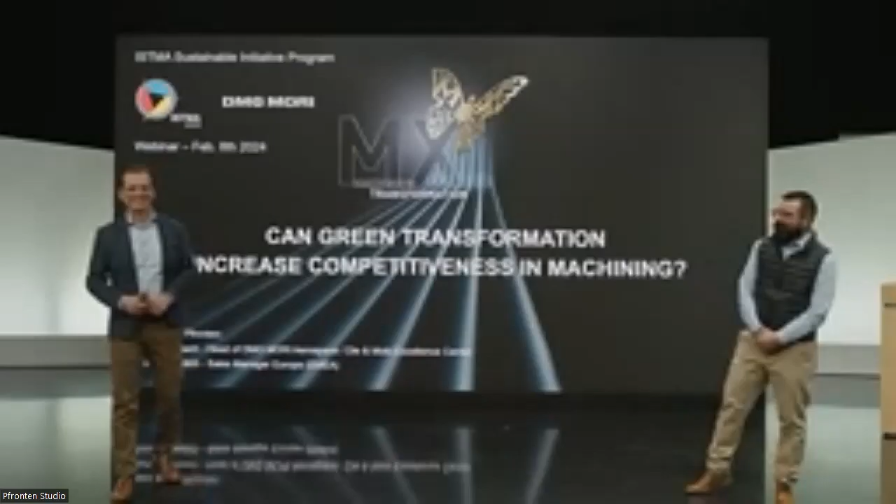Yes, thank you very much, Markus, for the kind introduction. Welcome to DMG MORI in Pfronten in the south of Germany. I have heard that we have participants from almost all over the world, so we are meeting now in the south of Germany. Very welcome.

For the webinar topic, we thought about asking a question about green transformation and whether competitiveness is possible in machining by going on this transformation. So we will do the presentation together. I will start with some general overview and our product strategy, and then my colleague, the other Michael, will go in more detail how we can use machine tools more efficiently with less energy consumption.

Before I start into the topic, give me 30 seconds to give you a short idea about DMG MORI if you don't know us. DMG MORI is producing machine tools, automation solutions, and solutions for digital and green transformation. We have 16 R&D and manufacturing locations worldwide.

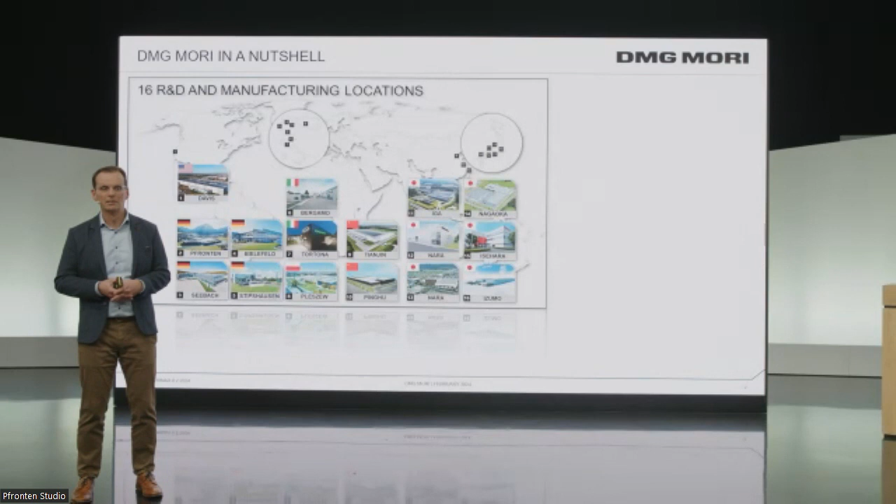So we are here in Germany, in Pfronten. We are the second largest factory of the whole group. We have more than 100,000 customers worldwide. I know there are some participants also from South Africa. We don't see Africa on this map, but we have also customers in this beautiful country and area.

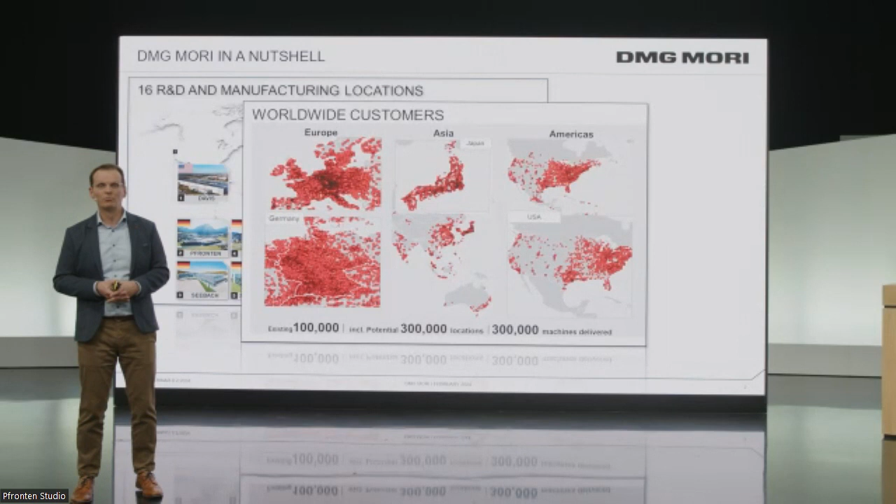We have around 300,000 machine tools worldwide operating from our brand, and every day there will be more. In sum, we are represented in 43 countries with sales, engineering, and service, 113 different locations. So you have an idea what DMG MORI is doing.

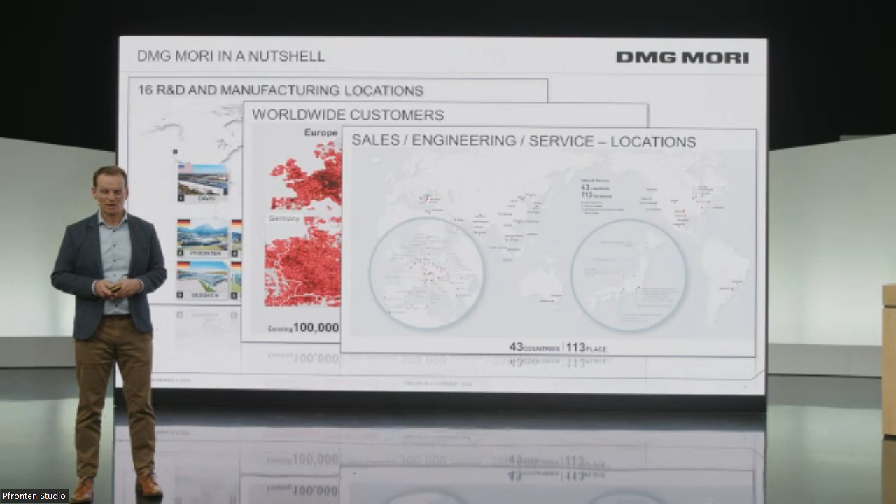But let's go to the topic. When customers ask us for machines or intend to invest into a machine tool, of course there are many technical questions to be answered, size of machine and so on, and a lot of commercial questions as well. But there are other questions which may also need to be answered, especially at this time where we have to look for sustainability and how we can achieve all the targets and challenges which we have.

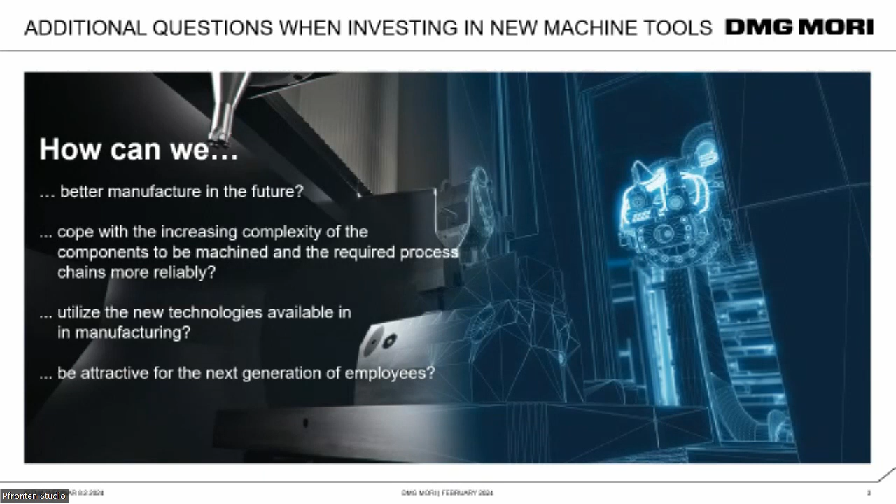So we have to think how we can manufacture in the future better than in the past with maybe old machine equipment. Today the parts, also in the die mold industry, in the tool industry, are more complex. They require a more complex process chain. We have to think how we can do this more reliably and get a better solution for this.

Today's machine tools have more capabilities than maybe 10 and 20 years ago. We have to ask ourselves how we can utilize these machine tools better. And of course, we always talk about a gap in skilled people, and especially the young generation. We have to be very attractive in production to attract young people to go into production, to go into manufacturing. This is also a very important obligation for us.

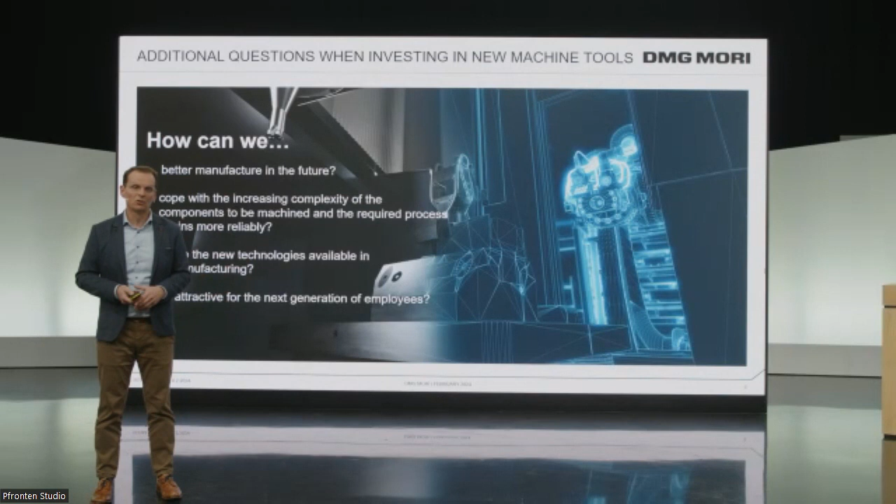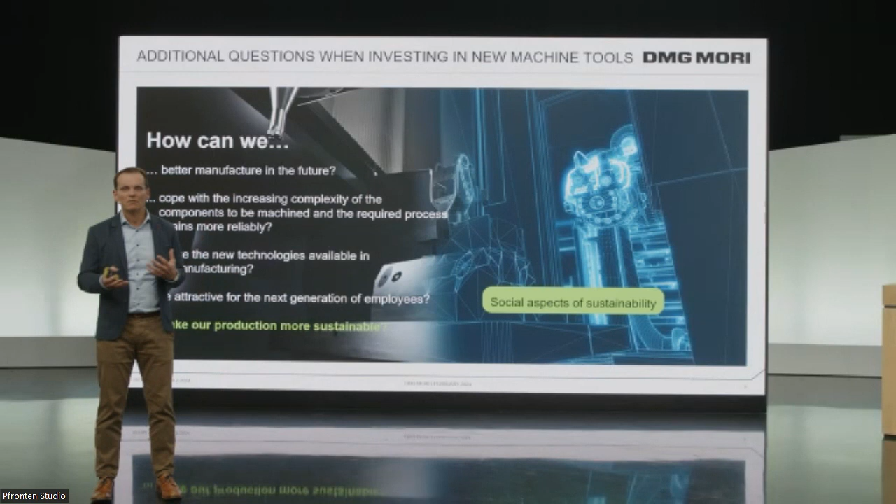But last but not least, we also have to think how we can make production more sustainable. This is, of course, sometimes this green question, sustainability, but thinking about the employees is also a social aspect of sustainability. So when we answer this question, we also take care of sustainability already. And for the other technical questions, we can also ask which technology helps us better with our targets in terms of sustainability. As you already can see, it's mainly a technical question we have to answer to become more sustainable, and then at the end also to become more competitive.

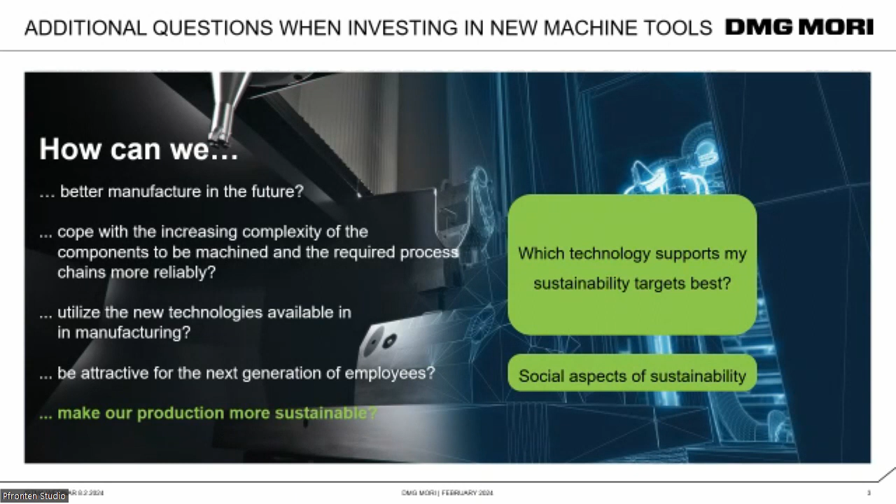In DMG MORI, we have a strategy for this, a product strategy. We call this machining transformation. You have seen on the first slide the butterfly, which is a symbol of transformation, of a journey, of a change. This machining transformation consists of four topics: process integration, automation, digital transformation, and green transformation. These things also belong together. I'll give a little example at the beginning.

When you have a component you want to machine on traditional machines, you may have different steps on different machines. When you use a modern machine, you can do process integration and utilize one machine much better than the simpler machines before. With higher utilization, you already give a contribution to green transformation - that's always about maximizing the utilization of your equipment.

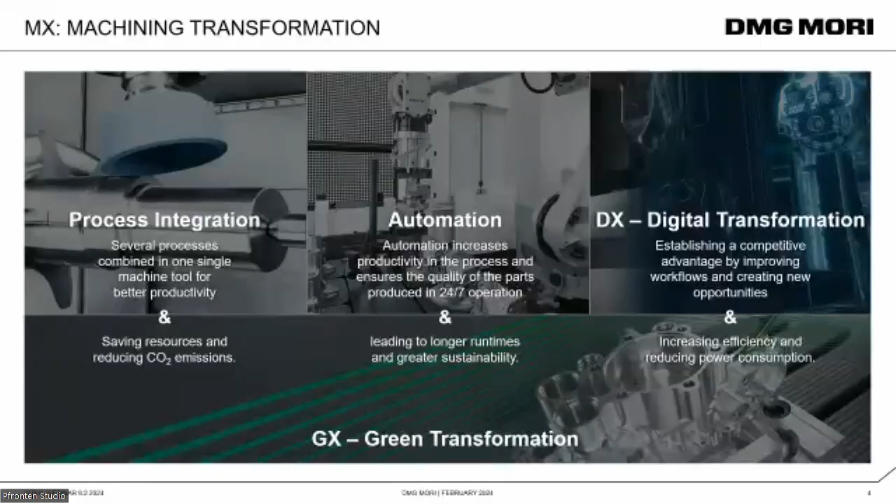When you then introduce automation, you increase utilization even more, up to 24/7. You achieve better quality, meaning less waste in materials, less scrap, less tool wear, and hopefully better quality at the end with less unnecessary effort. But when you have poor quality and a poor process, you have to invest in more resources. So automation also gives a contribution to sustainability.

These two steps make things a bit more complex, and you need software and digital tools to decrease this complexity. Then we are in the middle of digital transformation where we utilize software and hardware. Another example is that this software can make your workflows more efficient - you can get data from production to see where your waste is, where you spend too much time, money, and resources making a product. Based on the data, you can better work on improvements. So digital transformation also has a contribution to green transformation.

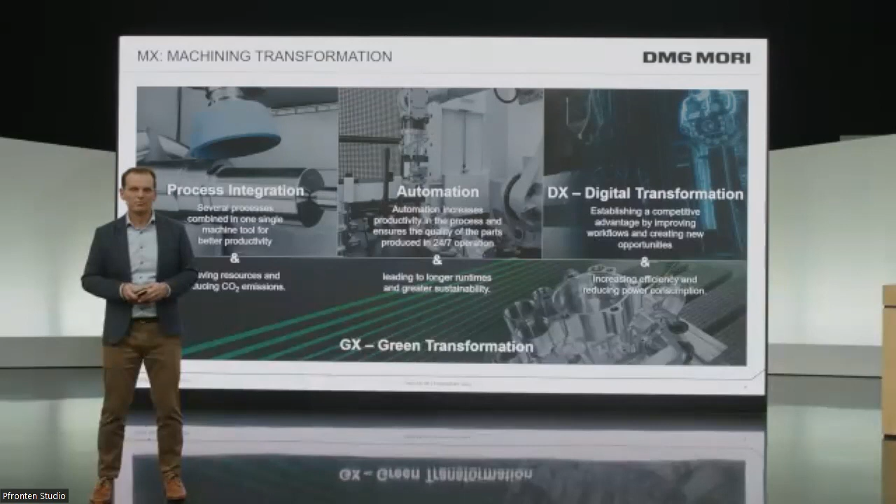So this concept, at the end, is a comprehensive concept. But nevertheless, we have to do more on the machine tool itself, where my colleague Michael Kieslich will show you what's possible. But first, we have to understand the full concept. I have also prepared two examples to show this in more detail.

Looking at this part - a camshaft, not a complex part - when we go through a conventional process chain in the past, we may have made this part out of 3 different raw materials on different types of machines. We had to have many operators to run the machines. Some machines are bottlenecks, some are idle most of the time. This is not very sustainable, and at the end, it's also costly.

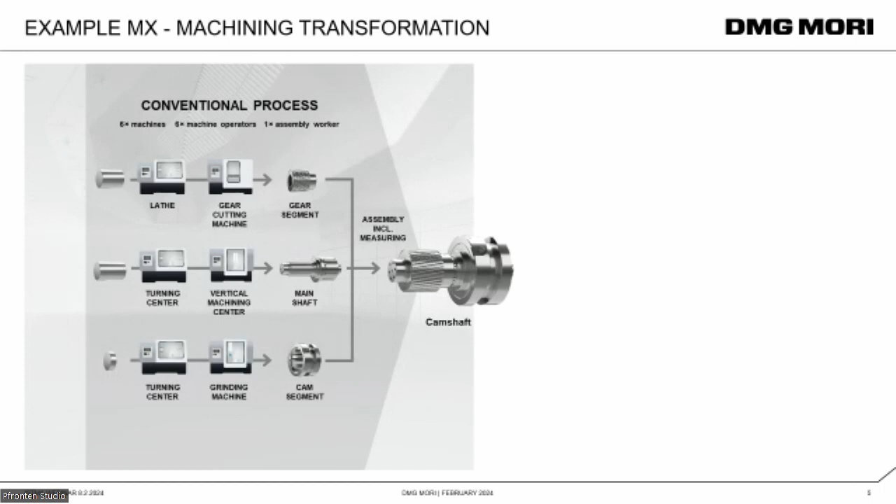When we go to a machine transformation with a modern machine tool where we can do really good process integration, we have the opportunity to make the part out of one raw material, with a complete integrated process chain - we can do turning, milling, gear cutting, and grinding only on one type of machine, meaning we can optimize much better. We can optimize one machine, but we cannot optimize and link several machines - that's more complex, more difficult.

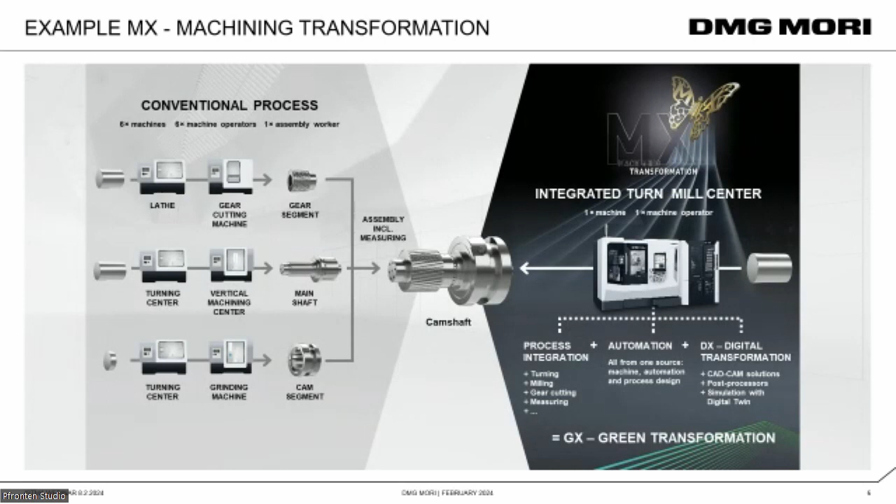To realize it, we need digital support - we need CAD/CAM systems, simulations, post-processors, and maybe many other things. So we have to see this in a holistic view, and then we can achieve higher sustainability in production. At the end, this production on the right-hand side is more sustainable than the conventional process chain on the left-hand side.

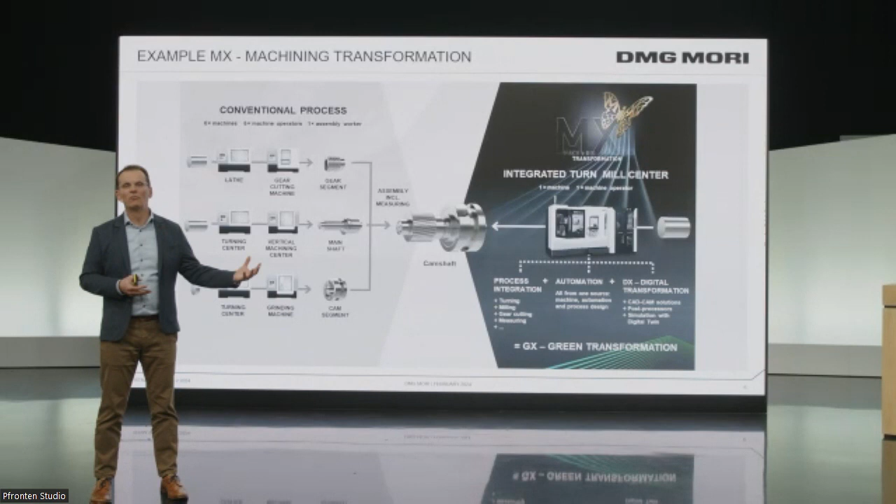I have another example, the last one, from another event. It's a rotationally symmetric part - in this case, a gear. You see on the left-hand side a conventional process chain, and on the right-hand side, process integration. We go from 13 operations to 5 operations, from 5 different types of machines to 1 type of machine.

We can significantly reduce the time to make the part, also the throughput time in my factory, and I can reduce the cost of my part. So we can also see that this integration of processes makes me more competitive at the end.

But we also make a big contribution to sustainability here, because we utilize one machine much more than other machines, which are idle most of the time because they don't use them all the time. And we have no bottlenecks, where we'd have to spend extra energy to overcome them, for example. We can do automation now and even increase utilization, and the process is more reliable now.

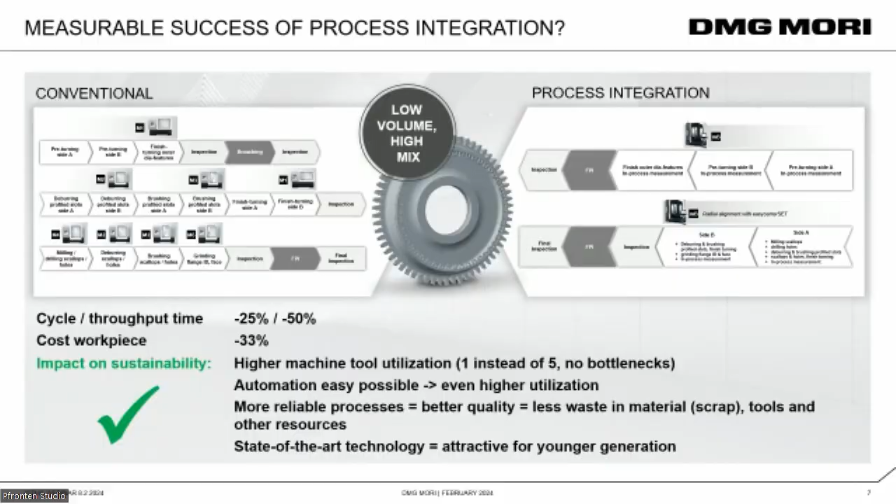So we have less waste in material, less waste in tools, and maybe we waste other resources less too, because of much better processes and a better process chain here.

Finally, we have state-of-the-art technology, which is more attractive to the young generation, because we don't work on old machines - we work on the most modern machine type. With automation, we need good engineers, and I think it's a very good motivation for young people to work in production, because production moves from an old style to a very modern style with the latest state-of-the-art equipment.

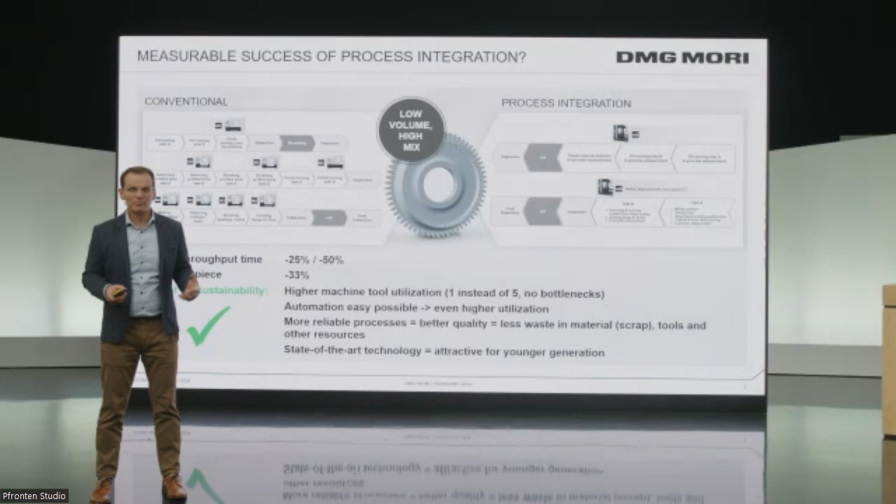This was just my introduction, and I hand over to Michael Kieslich to tell us more about what we can do in machine tools. Yeah, thank you, Michael.

Energy efficient machining and sustainability. Increasing energy consumption in the production and the rising and fluctuating prices are currently the driver of the green transformation. However, the awareness of sustainability is not only changing in the private life, it's also changing in the world of work and for companies. But let's start really on the top.

Here you can see the global energy demand in the year 2018. We had approximately 23,000 terawatt hours. 38% of this was used by the industry, and the unbelievable number of 2% went to the metal cutting machine tools. That's the number 460 terawatt hours. To get a feeling for this, whole Germany in the year 2018 used 574 terawatt hours. So that shows the potential on the machine tools to save energy and to be more sustainable.

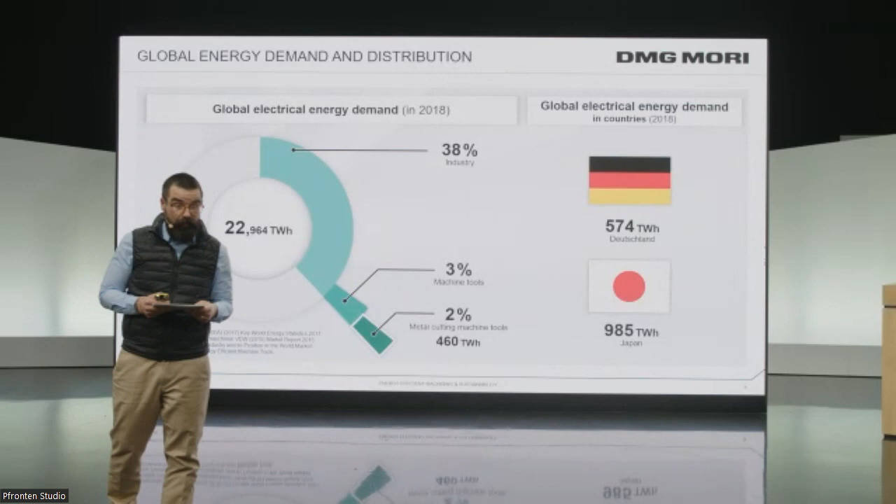When we go one step deeper and take a look at the machine tool, when you order a machine, normally you will get some planning documents, and in the planning documents of a machine tool, you see the power rating. And this shows that the main spindle needs 51% and the feed axis need 23% of the power rating. But when we take a look at the real and actual energy demand, it looks completely different.

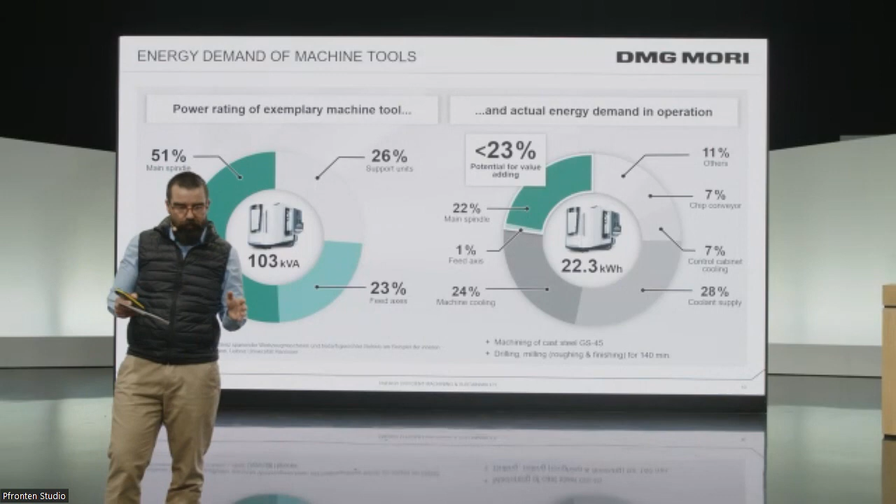It's important to understand that the energy consumption of a machine tool is always part specific. Is it a lot of roughing? Is it just finishing? A lot of tool changes and so on. So we checked here some simple part, and then we see that the main spindle and the feed axis, so the value adding features in a machine tool, just use 23% of the energy consumption. The rest is going to other units, like the machine cooling, to cool down the machine and bring the accuracy, the coolant supply, cooling of the control cabinet, or the chip conveyor.

So in our eyes, you have actually two options to reduce the energy consumption. Actually, it's three options. I will show this later. It's a quite simple diagram. On the one side, we have the process time. When you reduce the process time, you normally use less energy. How can you achieve this? Like the other Michael said, our idea is MX, the machining transformation. With process integration, you reduce the process times. With automation, you will get higher spindle run times and less downtimes on the machine tool.

Digitization with a simulation, or also to find out why a machine is down. This can be done via digitization in the machine tools. And this is a job of the customer, of the worker, mainly. On the other hand, the reduction of the real energy demand of the machine tool. That's our business, but also your business, because you have to use some options.

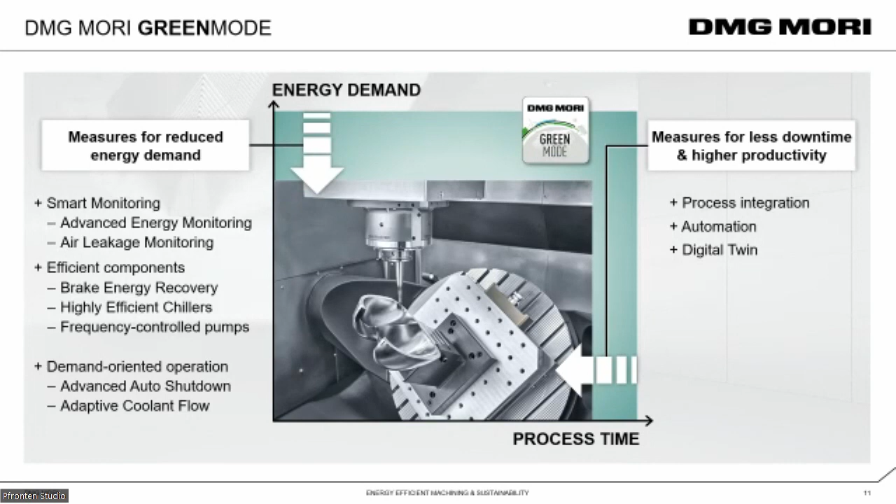How do we do this? We have a smart monitoring. A monitoring will give transparency, will give awareness to the worker of what the machine tool really needs when you produce a part. We have a monitoring to check if we have a leak in the pressured air circuit. We have to build in efficient components, highly efficient chillers, frequency controlled pumps, or we are using the brake energy and bring it back to the net. And a big focus topic for us is demand-orientated operation.

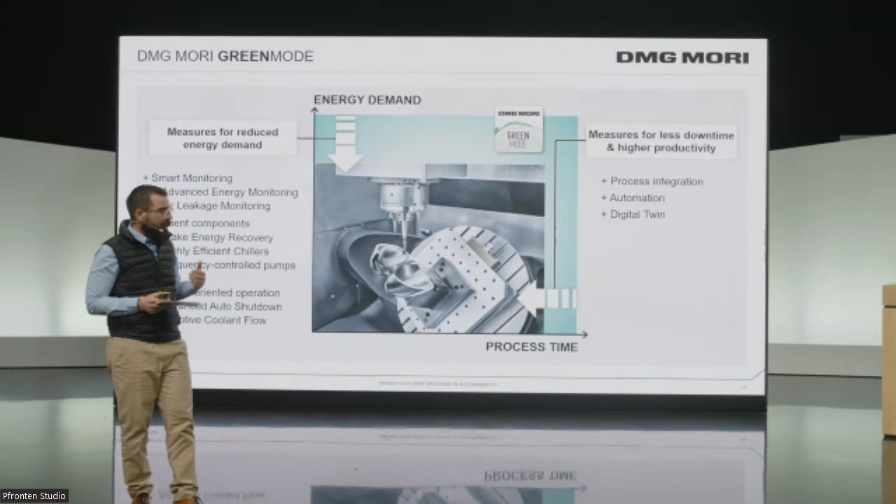Like a lot of machine tool suppliers, we also have some smart solutions for an automatic shutdown of a machine tool. That means if the machine is not working, it goes to an efficient mode. And last but not least, adaptive coolant flow. And this is the third point, the innovation. I jump over this, and our innovation, adaptive coolant flow.

What is our idea? When you take a look at this diagram, you can see the flow rate and the usage of power on the pump, in this case 80 bar in a coolant pump. And with this diagram, you see that the curve is quite steep. That means if you want to have a higher flow rate, you need a lot more energy on the pump. And from some point, it makes no sense anymore.

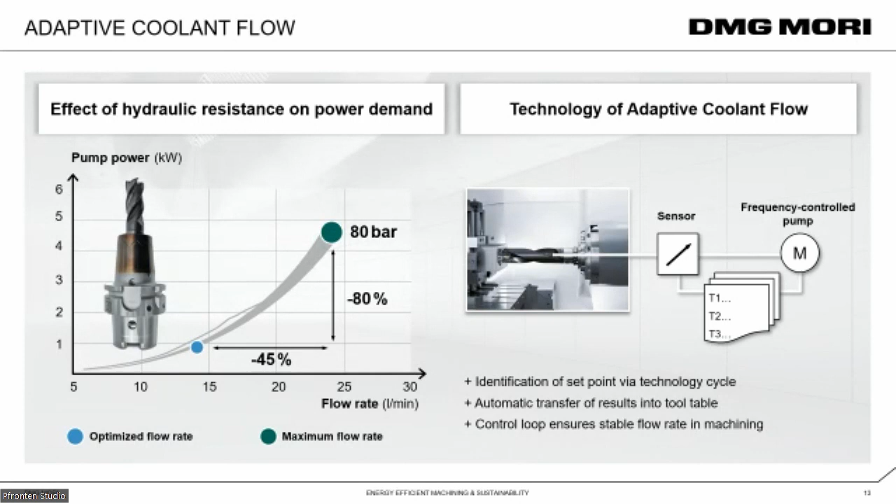Especially with smaller tools, this curve will be much steeper, very, very steep with some tools. And then it makes no sense to bring a lot of energy into the pump, because the flow rate will not be higher. So the flow rate is now a quite new unit. Nobody knows what is the right flow rate for a tool.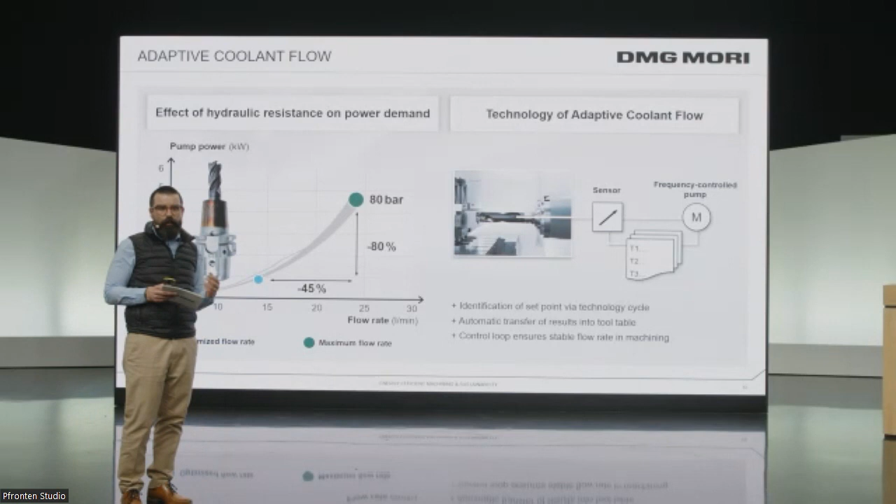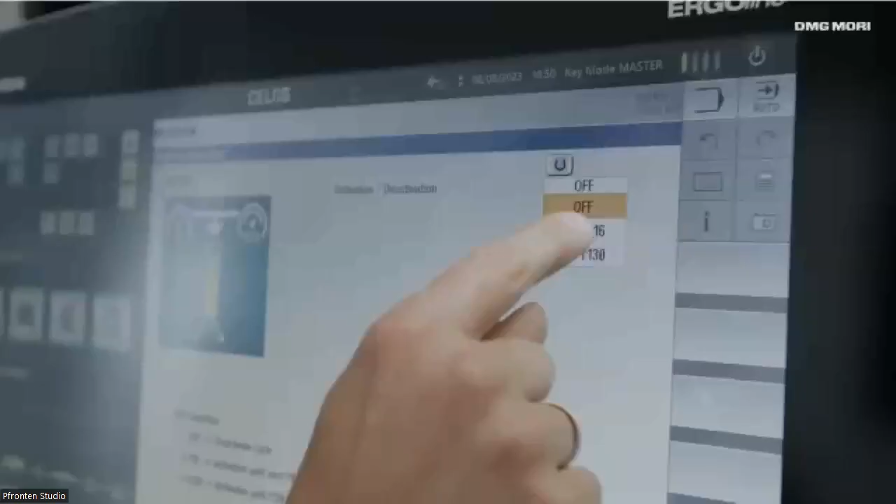And for this, we developed a cycle. With this cycle, the machine tool will check the tool on the first usage. So we select everything, and then on the first usage, the tool will come to the machine.

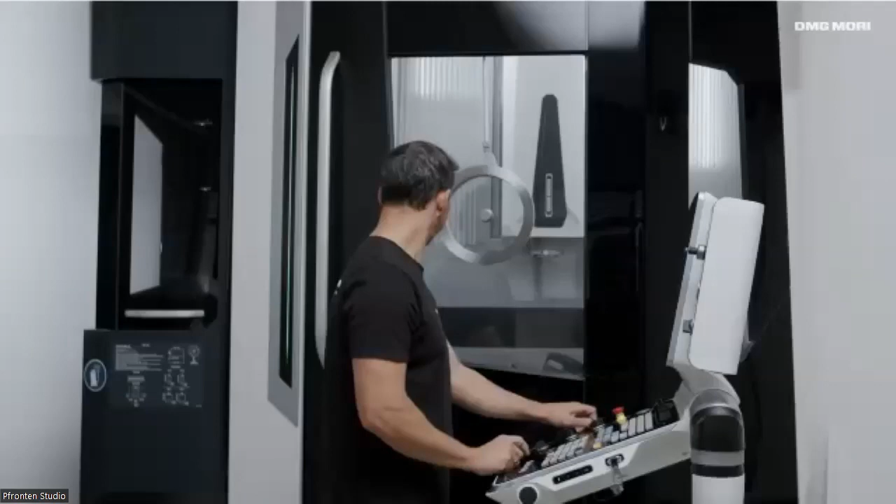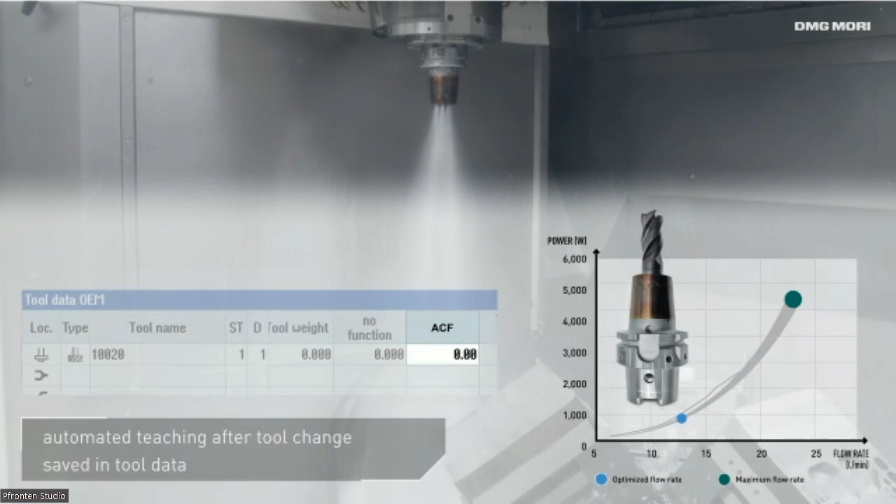The machine will check the tool, and we set the correct flow rate for this specific tool in the tool table and lock this down. And now the customer can work with this.

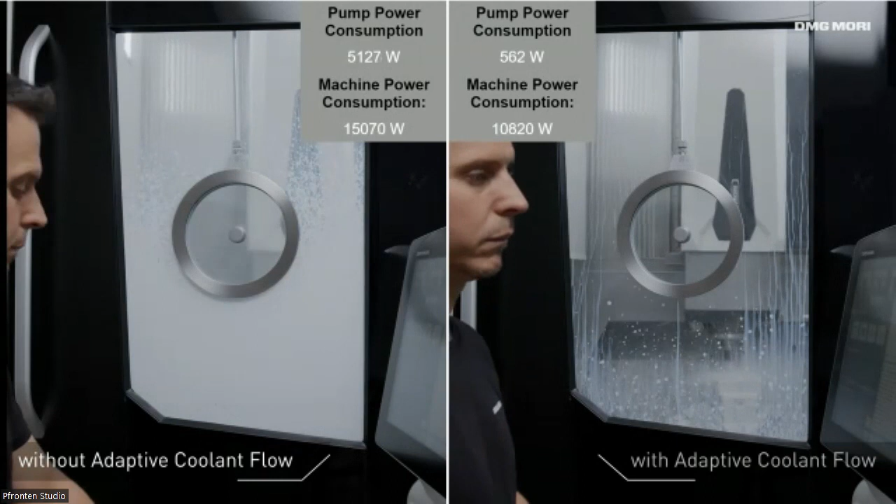And here the comparison. On the left side with 80 bar machining, the pump needs 5,000 watt. On the right side with adaptive coolant flow, 500 watt. So we have a reduction on the pump of nearly 90%.

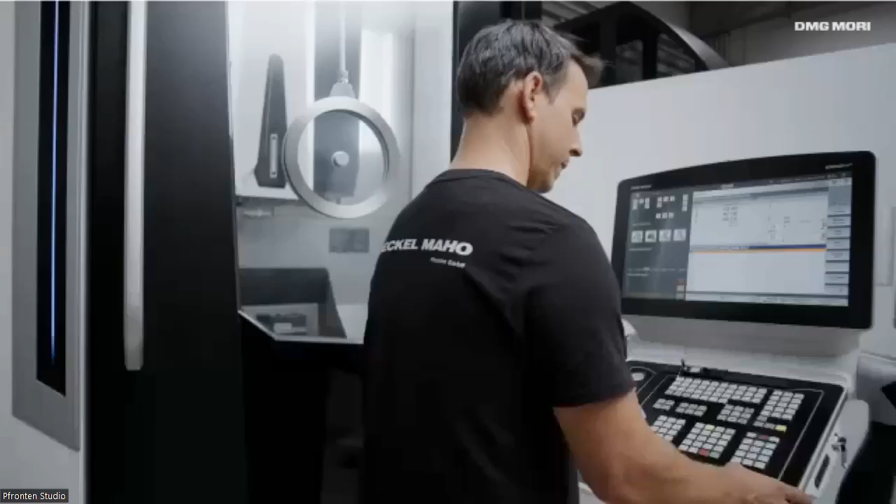Also here you can see much less oil mist in the working room area. This is also sustainable. Less oil mist means the vacuum doesn't take so much coolant out of the machine. You don't have to refill so much. That's also very sustainable. And then we noticed as well, especially in deep hole drilling, that machining with a constant flow rate will give a much higher process safety.

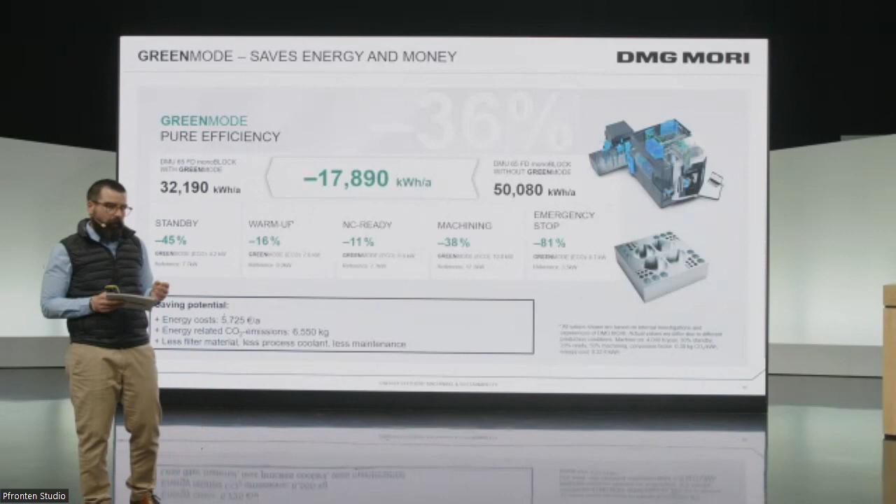Again, to get a feeling about the numbers and the potential on machine tools, we have here a comparison. We used our own machine, with all our energy saving measures on and off, and made some test parts. And here you can see we have in these test parts a specific process. We have a standby, a warm-up, waiting for machining, and emergency stop.

And when we use all our measures, you can see in the standby, we save 45%. How we save this? The machine knows that it is in standby, and we shut down the pneumatic, we shut down the hydraulic, we shut down the light. So we save 45%. On the machining, we save nearly 40%. This is driven from the adaptive coolant flow. We save 90% on the pump, and when we look at the complete machine, it's 38%.

And quite interesting, the emergency stop. It's quite common that when the shift is at the end, the workers put the emergency stop. That's the worst case. The machine is on, the motors are in control. So we compared the emergency stop versus our green mode auto shutdown. With this, we save 81%. So huge numbers, and it's quite easy to do this and to select this.

That means in a complete process all over, we saved 36%, and that's nearly 18,000 kilowatt hours per year with some calculations. And as comparison, a normal 4-person household has approximately 3,000 kilowatt hours per year. Just to get a feeling.

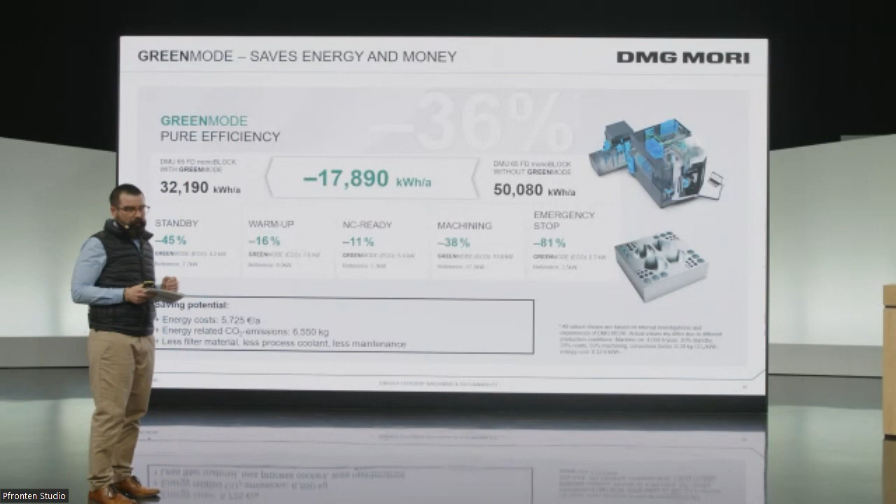But you can start now with your existing machines. How can you do this? A lot of machine tool suppliers have something like an auto shutdown. That means there is something to select so that the machine goes into an efficient mode. Use process optimization also with your existing machines. Reduce the non-productive times. Why? Finally, a producing machine tool is the most efficient machine tool. A waiting machine tool just needs energy when it's on.

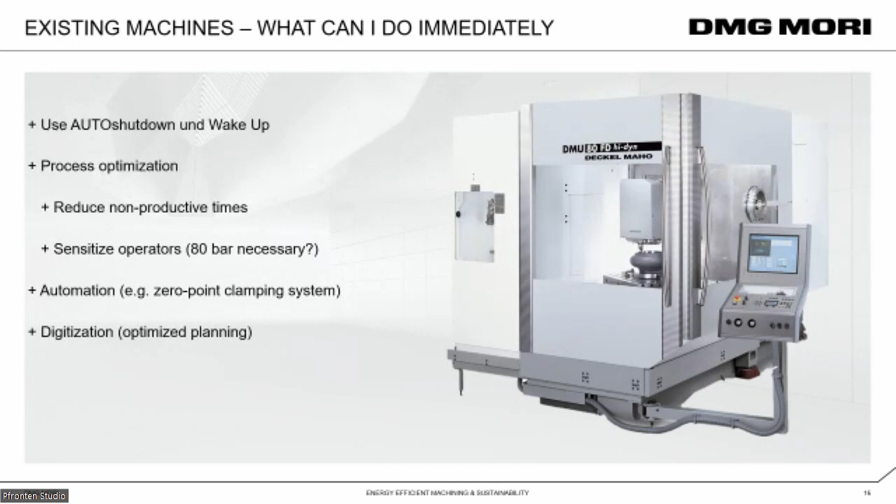Speak with the operators. If you have a variable pump, an 80 bar pump, the high pressures are not necessary. The high pressures need a lot of energy. Start with automation, for example just a zero-point clamping system to reduce the downtimes, and start with digitization. Have a good planning. Find out why the machine is waiting. Is it the raw material? Is it the tools? Just so that you get the big picture of your workshop.

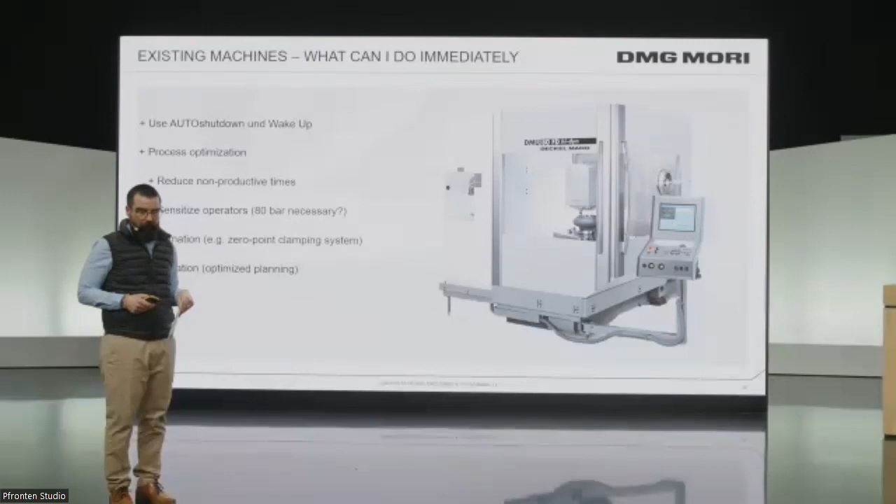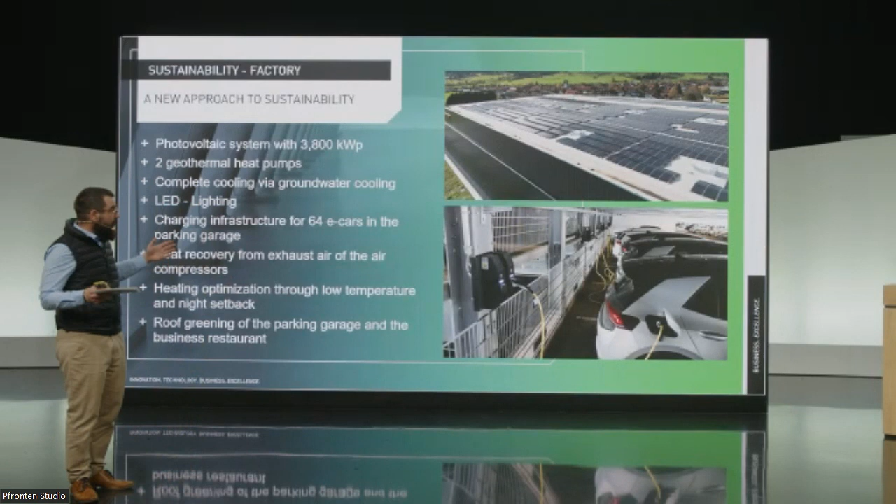So finally, what our factory is doing in the green transformation: we put a lot of photovoltaic on our buildings, as you can see. We started years ago when we built our new facilities with a very efficient heating system. So we have geothermal heat pumps, cooling by groundwater, a fully climate-controlled facility. We need this also to build high accuracy machine tools.

We changed everywhere to LED lights. We have a new charging infrastructure in our parking house. We use the heat again, also for the temperatures in the offices, and the rest of the facilities that are not ready for photovoltaic, we have greening and grass on them. Yeah, that's the short overview of our idea of the green transformation.

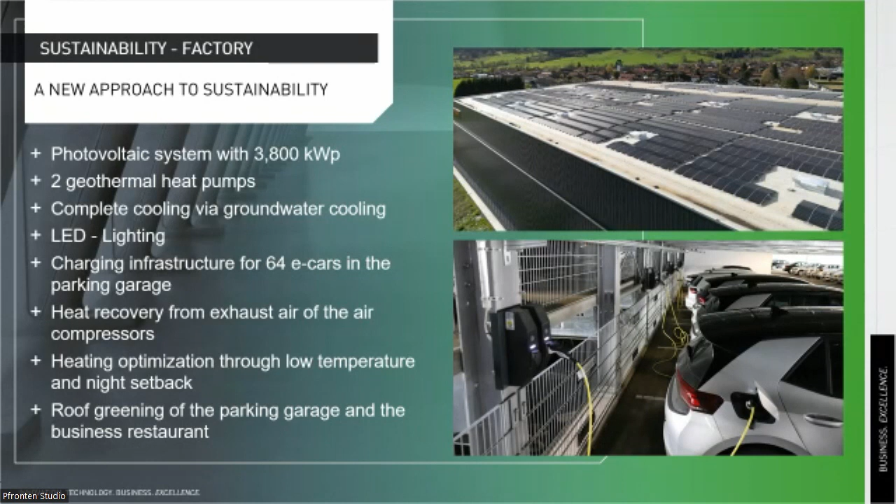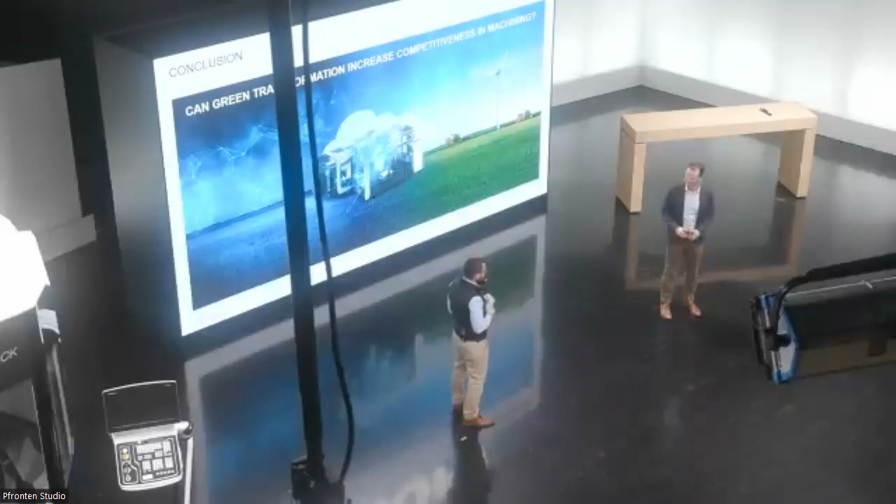And I will hand over to Michael again. Thank you, Michael, for this detailed technical explanation of what can be done on machine tools. We don't want to do less production. The answer means we have to do more production on the machines to be more sustainable. So when we started with the question, can green transformation increase competitiveness in machining? As a conclusion, we can say, of course, yes, but you have to do it in the right way.

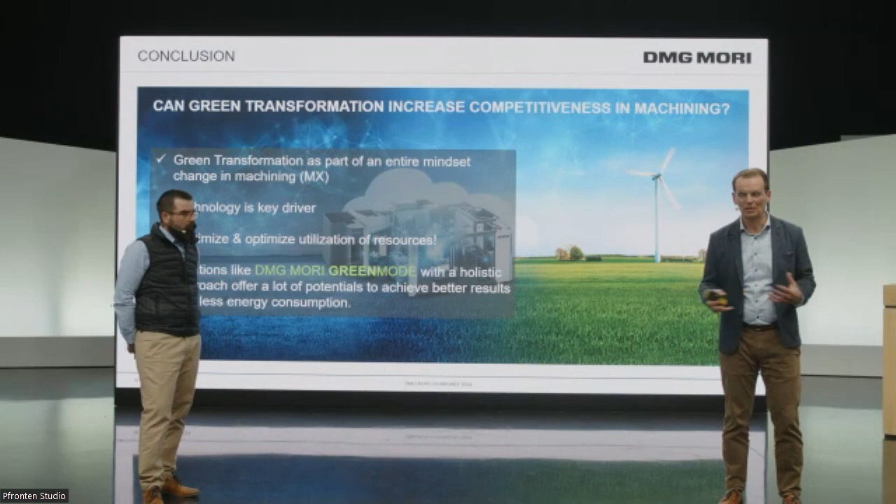And we have summarized that a little bit here with some words. You have to see the green transformation as a part of an entire mindset change in machining. In brackets, you see the MX is our machining transformation, this is our strategy. But I think every company has to define their strategy, how to be more efficient in the future, utilizing the equipment much better, and of course using state-of-the-art technology. Technology is key driver in sustainability.

If you have a production with very old machines with a low utilization, you waste energy in space, in heating of your factory with equipment which is standing around. So finally you have to maximize your resources and optimize it, as we have seen with the new solutions which are developed. And we just had the two weeks open house the last two weeks, and we had an own area where we showed these green mode technologies.

And I think it's not a surprise that many of our customers were very interested in this, to learn how they can utilize this in their factories. And we see that in examples like green mode, of course, a lot of research work was going on in the past, and now we have the solutions available, and I think there will be even more to come in the next years.

When we see this in a holistic approach, not just only the cutting tools, not just only the coolant, not only the machine tool itself, we have to look to the whole process, to the whole process chain. Then we see a lot of potentials to achieve better results, and also what I think we have seen on the adaptive flow control, we even get better quality because we give the tool the right volume of coolant, not too much. So even the quality increases, which also is sustainability, and we can produce the same parts with 36% less energy. And this is a good example.

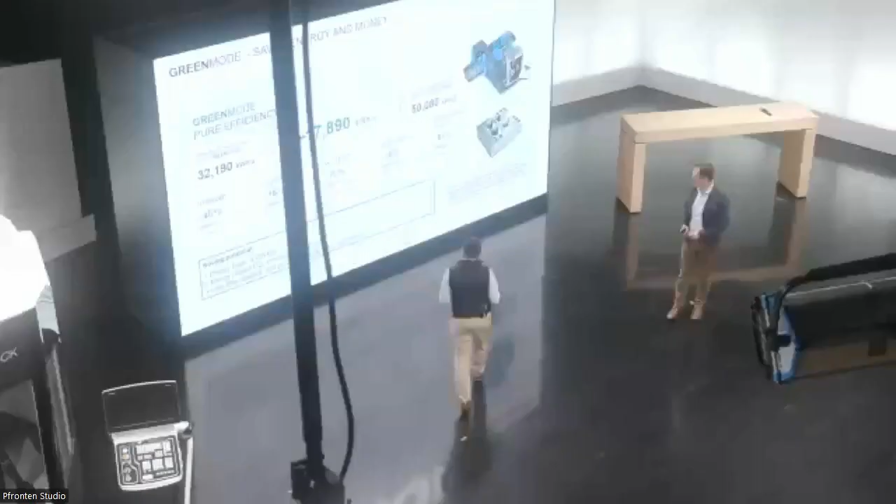I have a question to Michael Kieslich. In one of your charts, green mode saves energy and money, there was a calculation basis of energy costs per year. The value was 5,700 euro per year. Is that based on German pricing, or is that based on French or Swedish pricing? This was an energy cost of 32 cents per kilowatt hour. I didn't see that, sorry. Yeah, that's very small.

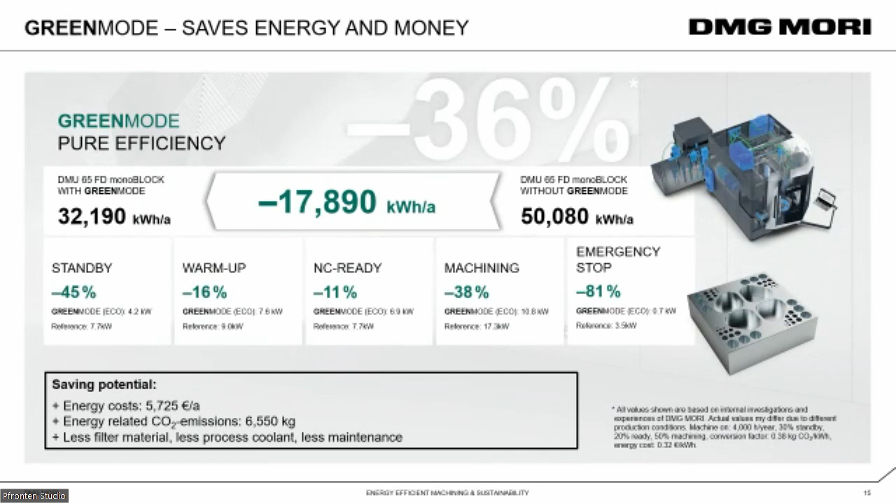So the calculation is based on 4,000 hours per year, 30% standby, 20% ready, 50% machining, and with the energy cost of 32 cents per kilowatt hour. I see. Yeah, so that's more or less German values. Yes, but that's how it is at the moment. Of course, when you do the same discussion with customers, for example, in North America, where the electrical energy is far lower, this calculation will be different.

On the other side, when you think about more reliable processes due to the machining transformation, you achieve better quality. You have less waste of material, less waste of tools, less waste of other resources. At the end, sustainability is money. You have to always translate sustainability in money to be motivated. But of course, in Europe, the driver is energy for us. And nowadays, everybody shuts down the light when he leaves a room. Five years ago this was different. So there is a mindset change. And there will be a mindset change in the machine tools as well.